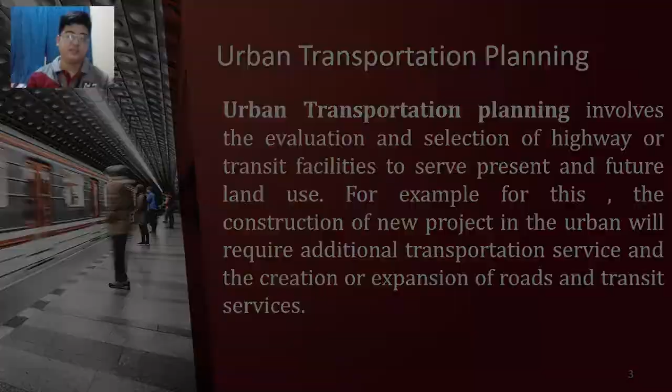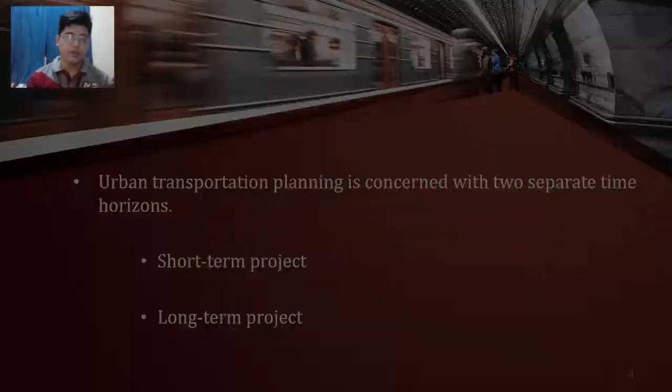Urban transportation planning is concerned with two separate time horizons: short-term and long-term projects. Short-term projects are implemented within a 1 to 3 year period, and involve programs such as traffic signal timing to improve flow, car and van pooling to reduce congestion, and park-and-ride parking lots to increase transit ridership and transit improvement.

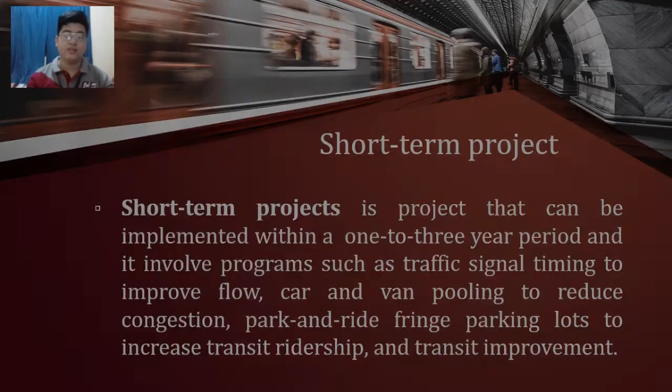Long-term projects are long-range transportation projects constructed over a 20 year period. They involve programs such as additional new highways, additional freeway lanes, rapid transit systems, and extensions or access roads to airports or shopping malls.

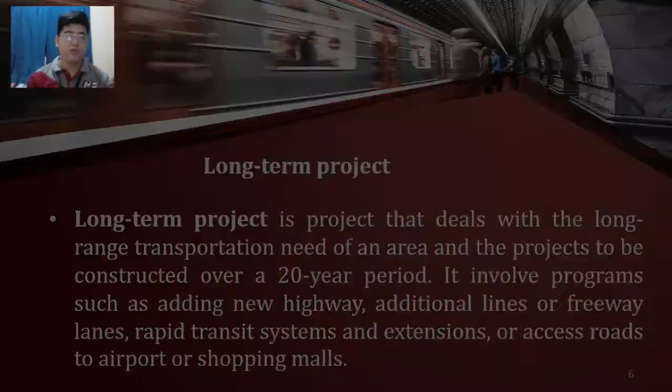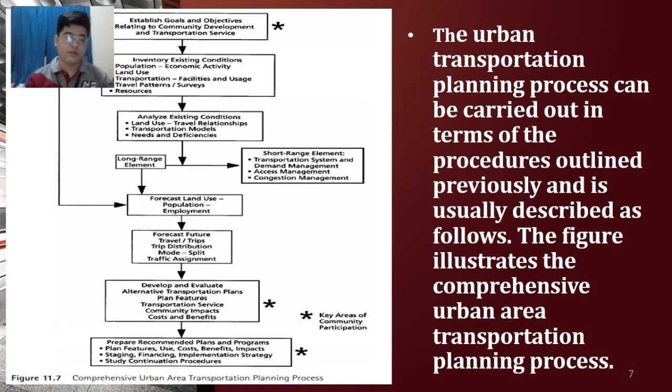Urban land use and transportation: urban land use reflects the location and level of the spatial accumulation of activities such as retailing, management, manufacturing, and residential. These generate flows supported by the transportation system.

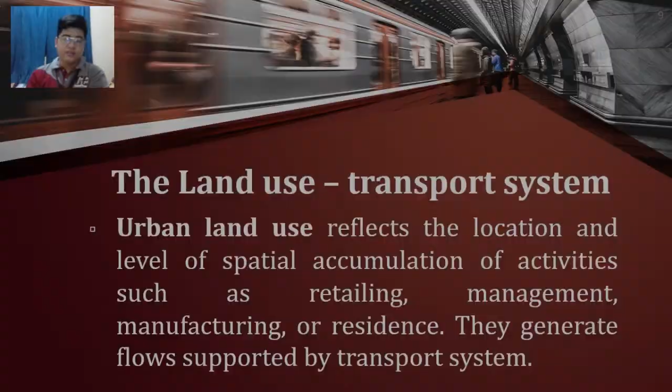Urban areas are characterized by social, cultural, and economic activities taking place at separate locations forming an activity system. These activities are related to the mobility of passengers and the mobility of freight.

This is related to our working process every day. Since activities have different locations, this separation generates movement of passengers and freight, which is supported by transportation.

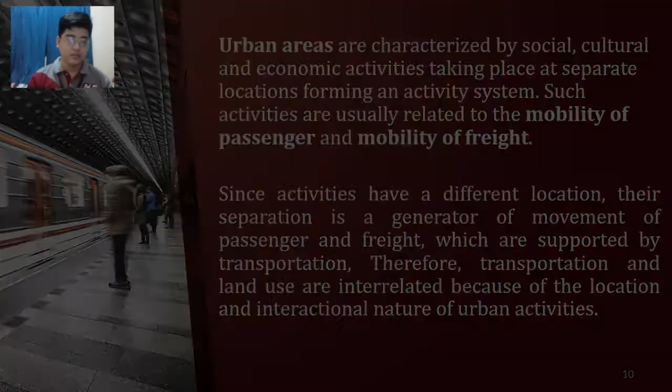Therefore, transportation and land use are interrelated because of the location and interactional nature of urban activities. The preferences of individuals, institutions, and firms leave an imprint on land use in terms of their location choice.

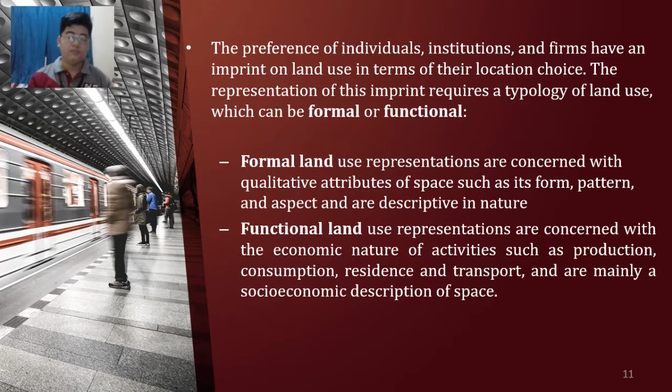The representation of this imprint requires a typology of land use, which can be formal or functional. Formal land use representation is concerned with the qualitative attributes of space such as its form, pattern, and aspects, and is descriptive in nature. Functional land use representation is concerned with the economic nature of activities such as production, consumption, residence, and transport, and is mainly a socio-economic description of space.

At the global level, cities consume about 3% of the total land mass. In the footprint of the city, residential use is the most common, occupying the largest share of the urban footprint.

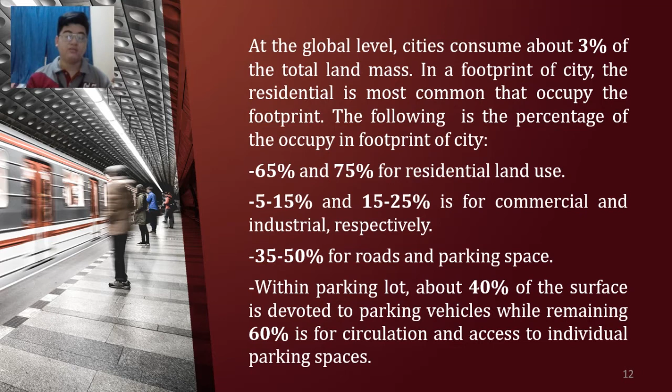The following are percentages occupying the footprint of the city: residential land use is 65% to 75%, commercial is 5% to 15%, industrial is 15% to 25%, and roads and parking space is 35% to 50%. Within parking lots, about 40% of the surface is devoted to parking vehicles, while the remaining 60% is for circulation and access to individual parking spaces.

These are the types of urban expansion. We have five of them: infilling, extension, linear development, sprawl, and large-scale project.

Infilling is development set on unused land or land being developed for new uses. So infilling is like renovating buildings.

Extension is the expansion of land use and development directly adjacent to existing land use. So it's new expansion of areas and development.

Linear development is similar to extension, but in this case expansion is shaped by an existing corridor of circulation such as a highway or transit line, like subway or light rail.

Sprawl is a standard form of suburban development taking advantage of scattered lots.

Large-scale projects are the settings of large infrastructure projects such as new ports, airports, industrial zones, logistics zones, or intermodal terminals, which consume a large amount of land.

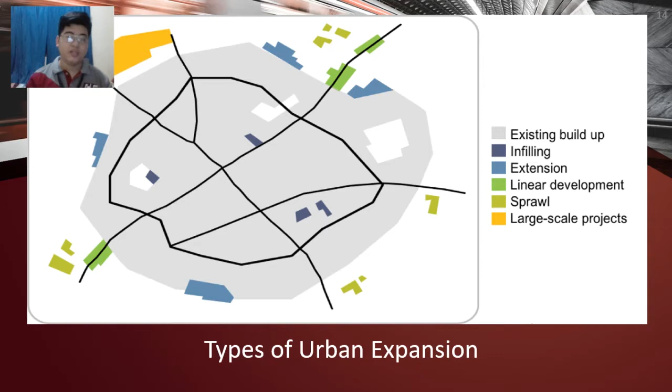This is a map showing the types of urban expansion. We have an example of the urban area with roads, and we can see the existing built-up area, infilling, extension, linear development, sprawl, and large-scale project represented on the map.

So, the relationship between land use and transportation. Understanding the relation between land use and transportation is extremely important for designing a prosperous and safe transportation society. Land use and transportation are interdependent.

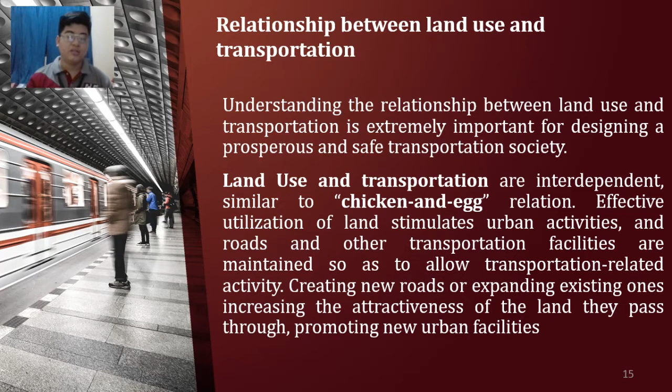Similar to a chicken and egg relationship, effective utilization of land stimulates urban activities, and roads and other transportation facilities are maintained to allow transportation-related activity. Creating new roads and expanding existing ones increases the attractiveness of the land they pass through, promoting new urban facilities.

When a city is growing slowly, it is easy to pace land utilization and traffic planning together. But in times of economic growth, demand for land use increases and the development of transportation facilities may be unable to keep up.

So cities that experience a high degree of economic growth will experience heavy congestion and other transportation problems, like traffic, in areas where it is hard to maintain the transportation system.

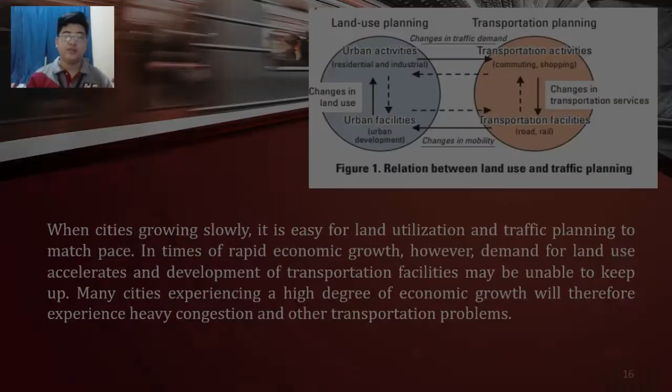Urban transportation aims at supporting transport demands generated by the diversity of urban activities and urban contexts. A key for understanding urban entities lies in the analysis of the patterns and processes of the transport land use system, since the same processes may result in different outcomes.

This system is highly complex and involves several relationships between the transport system, spatial interactions, and land use. The transport system is the transport infrastructure and modes that support passenger mobility, generally expressing the level of accessibility.

Spatial interactions are the nature, extent, origin, and destination of urban mobility of passengers and freight. They take into consideration attributes of the transport system as well as land use factors that generate and attract movement.

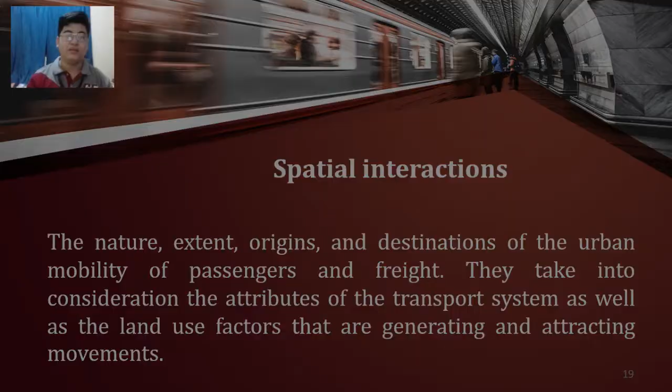Land use is the level of spatial accumulation of activities and their associated levels of mobility requirements. Land use is commonly linked with demographic and economic attributes.

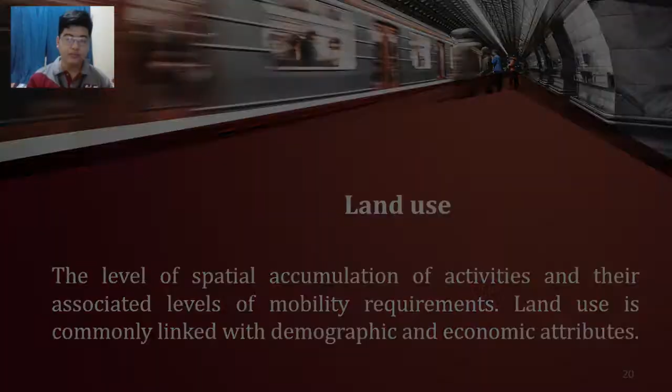Lastly, the relation between transportation and land use has been the focus of a long line of geographical representation, including models, mainly driven by economic and technological changes. It is expected that ongoing changes related to digitalization, such as e-commerce and automation in manufacturing and distribution, will continue to shape the urban spatial structure in the 21st century.

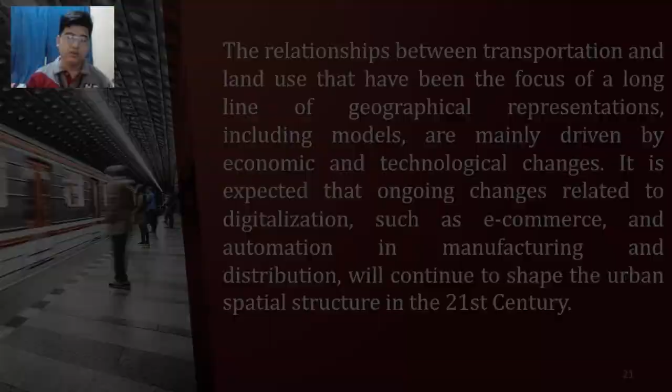I will share this video for more information on urban transportation planning. So, let's start the video now.

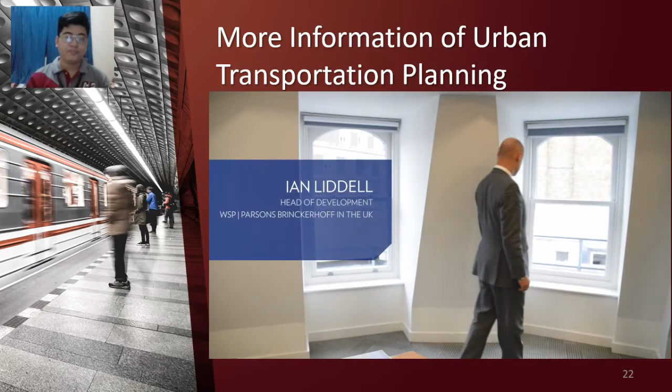We were appointed by Capital and Counties to be their transport consultants for the Earls Court Master Plan. It's a 32 hectare site with only 3 landowners. When we started on the job, we thought the draft allocation for residential and employment uses in the London Plan didn't fully reflect the sustainable development potential of this site.

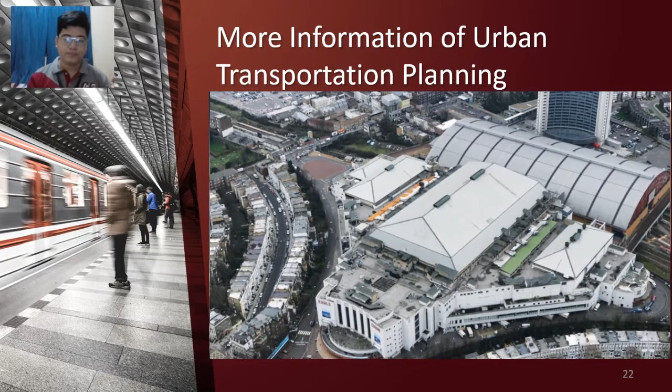There were 3 London Underground stations around the edges of the site, plus an overground rail station. As such, we thought there was a bigger opportunity to achieve better integration of land use and transport planning. We carried out a number of technical studies looking at all of the transport modes to help get an idea of the development capacity which could be achieved at this site.

Terry Farrell was appointed as master planner, and we worked with the team to develop his initial master plan sketch into an outline master plan. There were lots of challenges which had to be dealt with.

There was a very congested road network around the site. Although there were stations on the rail and underground network, they had some crowding issues, and a lot of the train services themselves were crowded. The site was severed and split into 2 by the West London line.

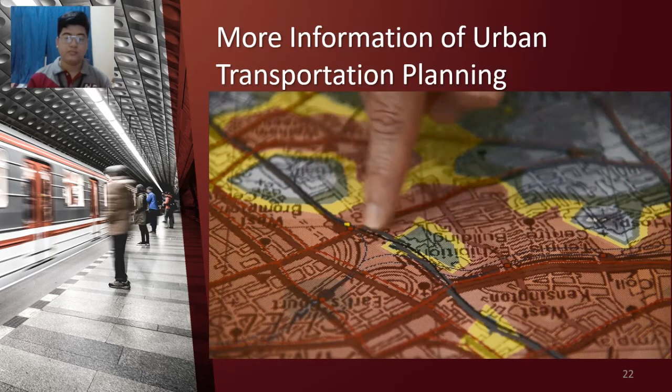So we worked on technical solutions to all of those problems. There was a proposal for the West London line to be decked over to reunite the site and better connect it with the surrounding public transport nodes. That meant a new linear park could be developed through the site.

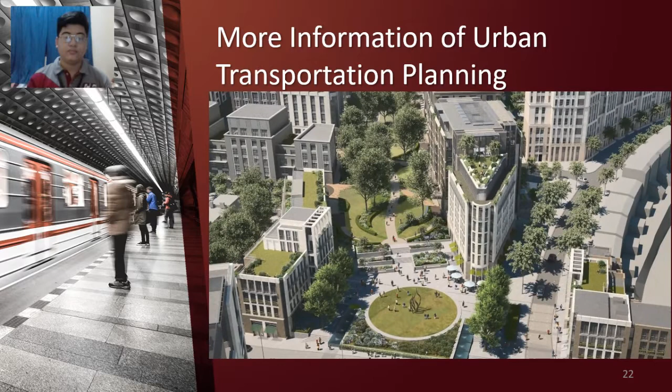We looked at the stations with the team and helped design and analyse station improvements to increase capacity and safety. We also found it was possible to better coordinate traffic signals on the wider highway network, allowing the additional development traffic to be accommodated in a much better way.

The site now has a consented master plan for 10 million square feet of development, including 7,500 homes and associated social infrastructure. I've been told it has an estimated gross development value of £12 billion, which would make it the most valuable planning consent in the UK.

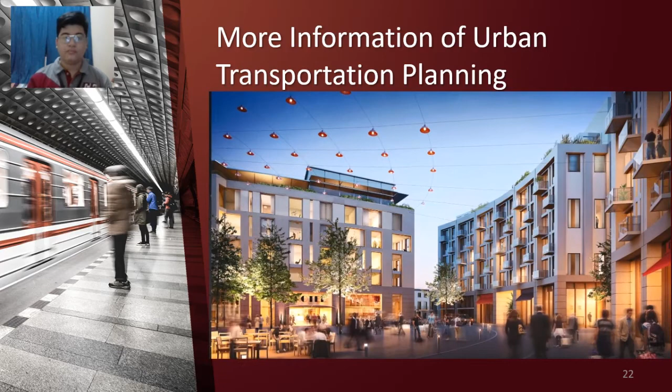I'm proud that through our work we've helped with the delivery of much needed housing for London, along with improved public realm and transport improvements.